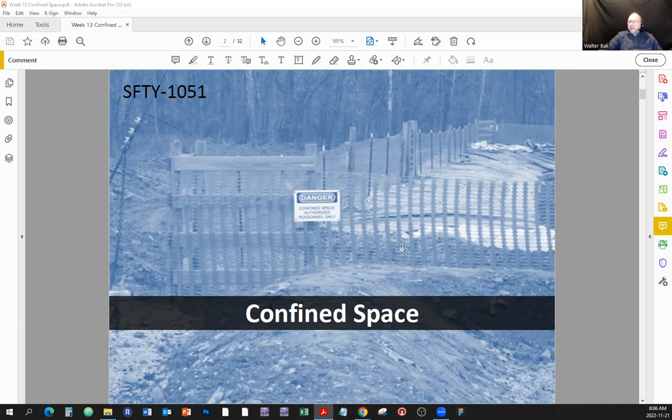Safety 1051, confined space lecture for today. All right. Just before we start, what do we have here? Just a little picture explaining things. It's a bit of a pre-word to the text that we're going to analyze in the next slide.

This would be some sort of a hopper. Right? A hopper is a device, well, a huge device to sort or load grains. For example, in this case, it's loading grains, so there will be huge containers here with some outlets at the bottom, and the grains are coming out over there.

There will be a little bit of a catwalk, and the catwalk is this right here, this walking area with some railings, of course, because it's on heights. And that's where the workers can walk and do whatever work they need to do there. All right. So here is a hopper. Here's a catwalk on top of the hopper. Okay.

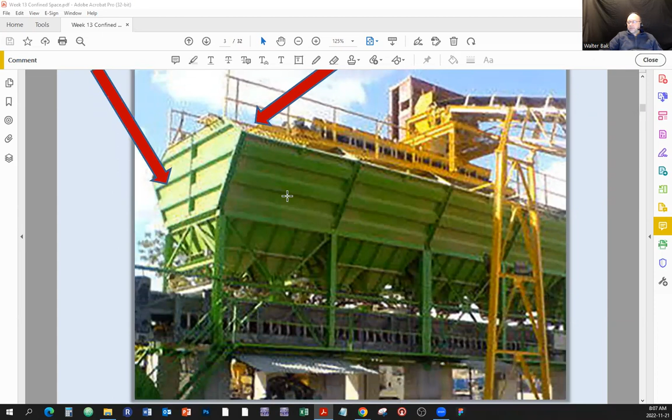So let's look at a certain case study. Here's the case study. While workers were unloading sand from a cement mixing hopper, the material became stuck and stopped dumping from the container. So this will be the container, and the grains or whatever the material would be just coming out of this outlet right there, loading onto what looks like a huge conveyor belt. So something stopped loading, something got stuck, so somebody came there and started investigating what's going on.

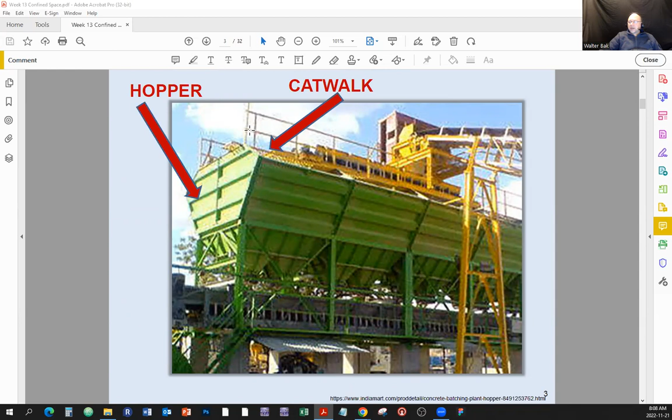A worker walked along the nearby catwalk with a 7-foot pole, intending to dislodge the sand. Okay, so it was a sand thing. Once the worker was near the hopper, he was out of view of the other employees. The top of the hopper was open, and while there was no designated entry point, the hopper was accessible from the catwalk. At some point, the worker entered the hopper, but no one could see him. No one knows whether he accidentally slipped or if he entered the hopper voluntarily.

Okay, hold on. When the sand became dislodged and began moving again, co-workers saw the 7-foot pole fall out of the bottom of the hopper with the sand. They were unable to locate the worker on site and realized he must have fallen into the hopper.

Eventually, rescuers extricated the worker from the bottom of the hopper and administered CPR, but unfortunately, he succumbed to his injuries a short time later. So that would be a fatality, a fatal accident, right? So here's the case study that we're opening up this lecture with.

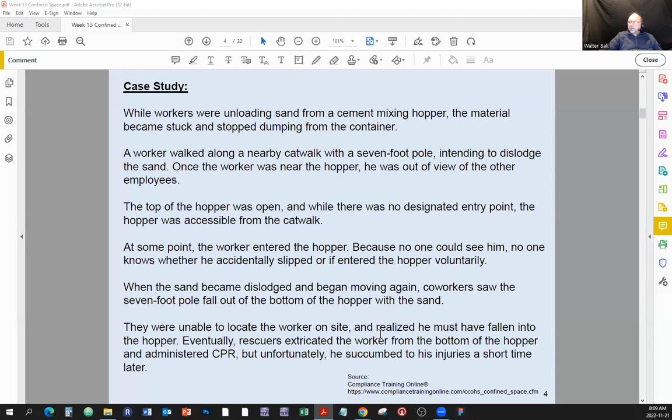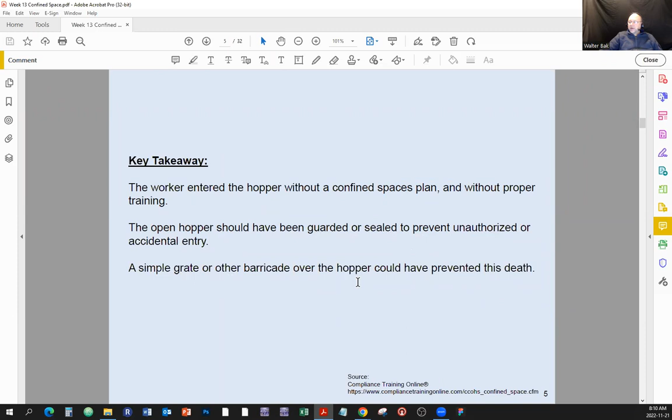Takeaway: the worker entered the hopper without a confined space plan and without proper training. The open hopper should have been guarded or sealed to prevent unauthorized or accidental entry. A simple grate or barricade over the hopper could have prevented his death. All right.

Excuse me. So then we're entering the topic of confined space. What's a confined space? And sometimes I read things, you know me by now. A confined space is a space that is large enough for a person to enter and work. That is the first condition. Has limited or restricted means of entry and exit. And here's the key: it is not designed for continuous occupancy.

Again, a confined space is a space that is large enough for a person to enter and work, has limited or restricted means of entry and exit, and it's not designed for continuous occupancy.

Here's how the Ontario regulation defines confined space: confined space means a fully or partially enclosed space. So you're looking at the legal documents here. And here are two conditions.

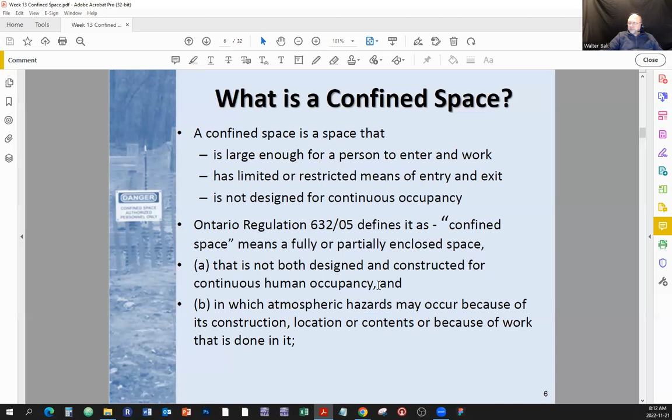Now, let's look at something that's called a permit required confined space. So first, we got the confined space in general. Then there's something that's called a permit required confined space. A permit required confined space has at least one of the following characteristics. It contains or has the potential to contain hazardous atmosphere, which, well, atmosphere is the air that we breathe in. Okay.

Contains a material that has the potential to engulf an entrant. What's engulfing? Well, if somebody drowns, they are engulfed in water. If somebody drowns in sand, then the person would be engulfed by sand or grain or so. So here's the engulfing thing, all right?

Also, it has internal configuration, we're going to analyze some of those situations, such that an entrant can be trapped or asphyxiated. Basically can no longer breathe. Or contains any other recognized serious safety and health hazard. Right, so here's a definition for permit required confined space.

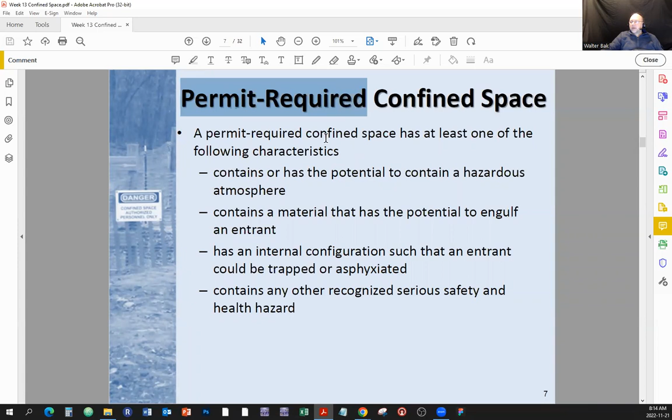Yeah, we do a lot of reading today, right?

What is an entry permit system? Well, an entry permit system is an administrative tool used to document the completion of a hazard assessment for each confined space entry. Things are serious. Someone fully trained and experienced in confined space work would complete the entry permit. It's not just anybody, right? You have to have a training to complete that.

Some jurisdictions require a permit for all confined space entries. So depending on where you are, you should be familiar with the local laws, rules, and regulations. An entry permit is required for confined spaces where the hazard and risk assessment determines the measures to control the risk involve the following.

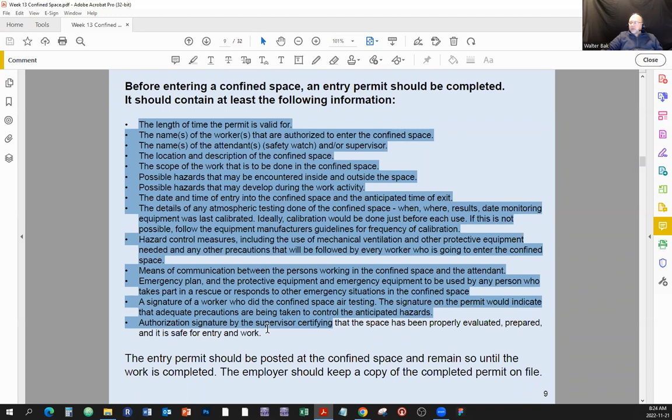The entry permit should be posted at the confined space and remain so until the work is completed. The employer should keep a copy of the complete permit on file. Still talking about confined space. All right, and here's the definitions. Once you download the file, you'll be able to have that. Hazard: what is hazard? Something that can cause harm, for example, toxic gases. A risk: a chance the hazard will cause the harm. Example, a high or low risk of asphyxiation.

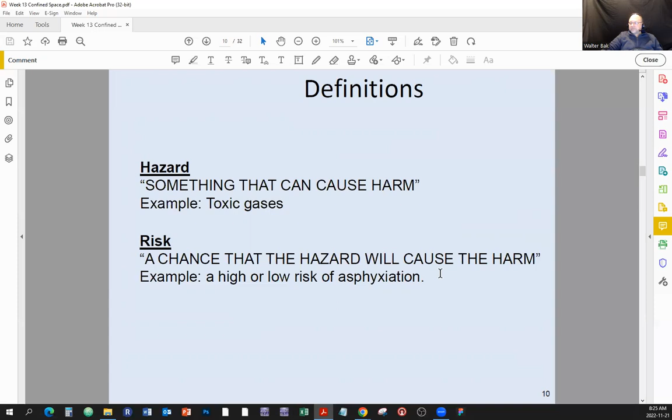Let's look at the confined space hazards. Keep in mind, the confined space is a space that you can enter and work at, but it's not designed for continuous occupancy, like somebody's office, where you can go and work 8 hours a day, 5 days a week. Confined space is a space that you have to enter sometimes, and it is not designed for you to basically work there all the time. So what are the hazards of confined space? Well, oxygen deficiency, that will be the atmospheric thing, right? Flammable or combustible gases and vapors.

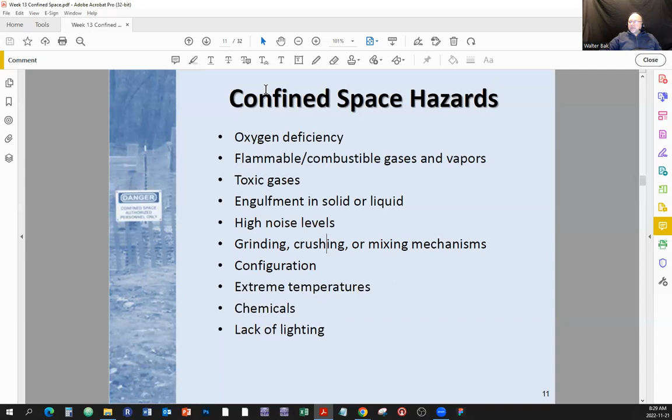Grinding, crushing, or mixing mechanisms. This will be part of the configuration of the description of the thing that would classify the space as a confined space. Right? So these two kind of get together. Extreme temperatures, chemicals, and lack of lighting. So these will be confined space hazards. All right.

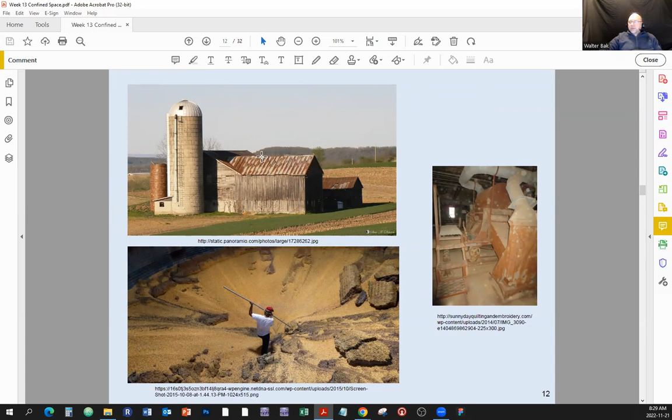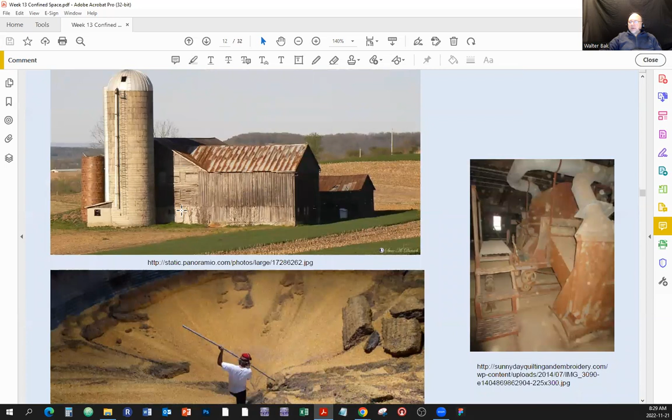What do we have here as far as confined space? Here are some examples. There's a silo. What's inside the silo? This thing is filled with grain right here. If somebody enters, if somebody falls in, they could be engulfed in the grains. This is the possible configuration of what's inside something like a silo, all right?

This person can be engulfed or overwhelmed by whatever the, well, it looks like sand and other debris. So in both cases here, you're talking about the hazard of, well, engulfment would be the main thing, right?

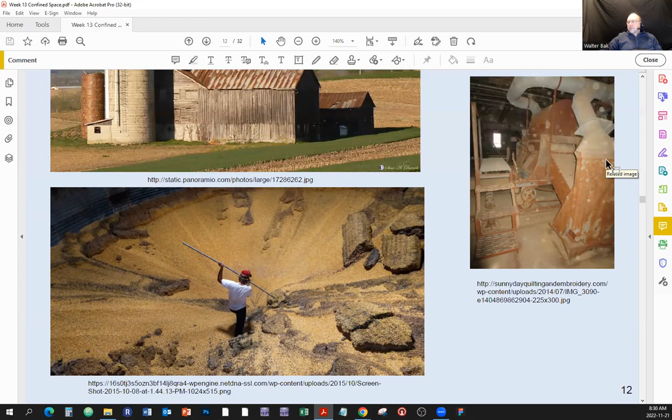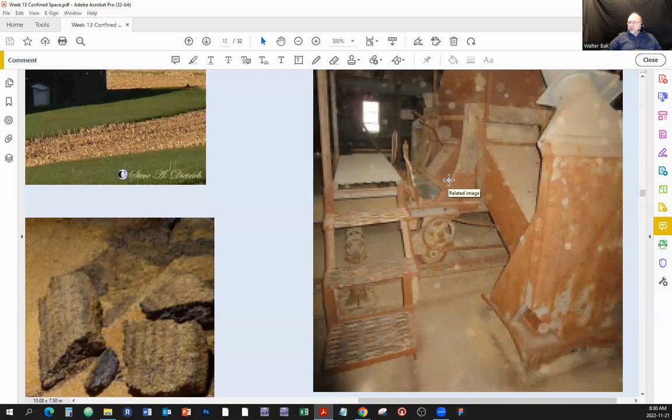Over here, here is a room with some sort of moving machinery and whatnot running. So this would be a space that is not designed for continuous occupancy. Maybe once in a while, you just have to go and adjust something and check for something. And this would be the example of the configuration, which means the arrangement of things that are inside, that could possibly pose a hazard to your health or well-being. And here are the references if you want to click on things. You can find out more about this.

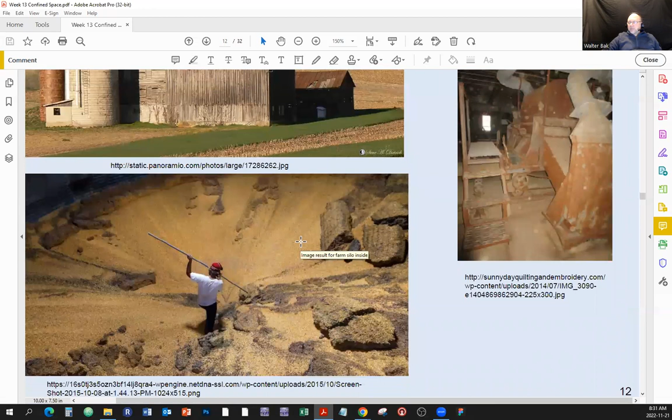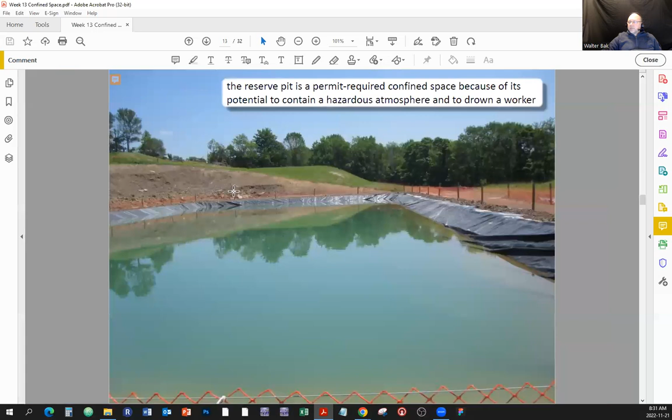All right. Now here is an interesting thing. You see this reserve pit here is guarded by a fence. The reason for that is, let's just see what that says. This reserve pit is a permit required confined space because of its potential to contain a hazardous atmosphere and to drown a worker. So at first you would see, okay, what can happen here? Well, somebody can fall in and drown. That's the first thing that comes to our mind. But no, you have to consider other things.

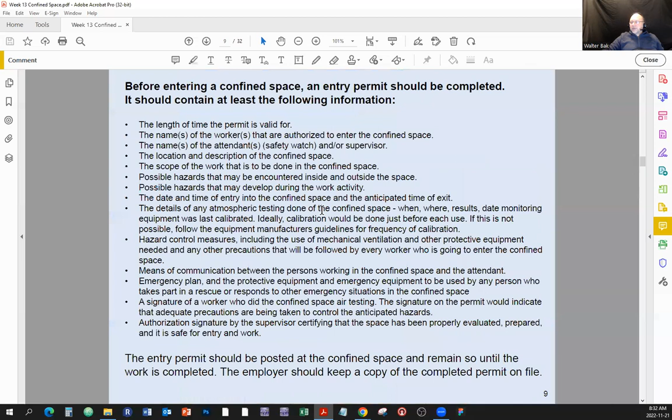Whatever that thing is here doesn't necessarily have to be pure water. It could be some sort of chemicals that if you come close to that, you can be overwhelmed by the chemicals, by the vapors, and then you can fall in. Or even if you don't fall in, you can still die because of the vapors that are in close proximity of that pit. So yes, this would be considered a permit required confined space because it contains any of that here.

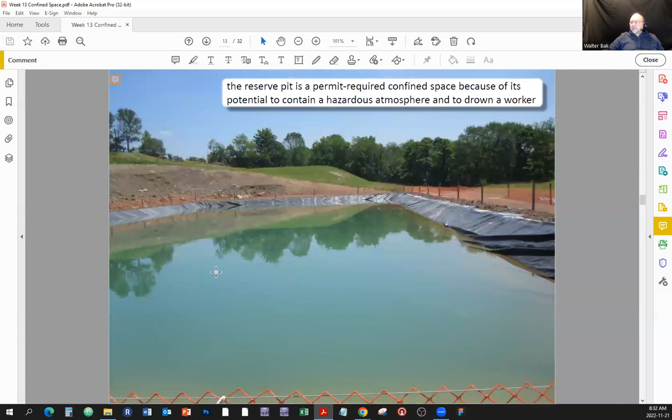All right, next slide. Here's an example of a permit required confined space. Again, there's an entry. Of course, definitely, this is not a space that would be classified as a continuous occupancy space. There's an entry here that a worker can get in and out, but it's a limited entry. There are many hazards there. There could be lighting, there could be high noise level, there could be some atmospheric lack of oxygen and whatnot. All right, so this would also be classified as a permit required confined space.

And on the bottom it says, always follow your company's permit procedures, even if you are going in there for just a second. This is how most of the accidents happen. I was just going to poke my head in there. Okay, well, there's a reason why things are being spelled out in this way. And unfortunately, the reason is because something happened to someone in the past.

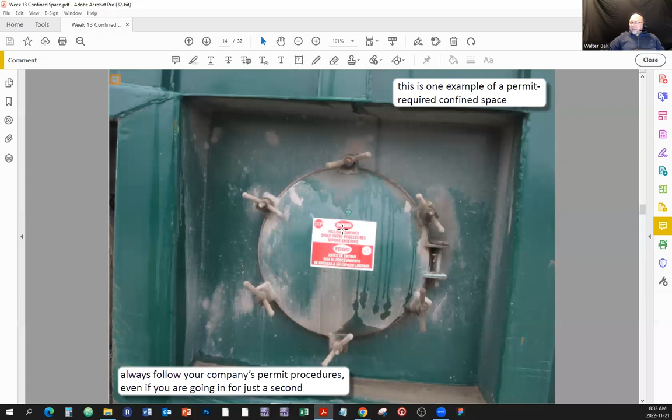I just want you to know that something like that exists, and if you are going to work or you're going to be asked to work in anything that could be classified as a confined space, I want you to recognize the hazards. I want you to recognize the signs of something being possibly considered as a confined space. Because for whatever company you're working, the person who sends you for a service call might not know that once you enter the building, oh, whoops, you're going to be dealing with a confined space.

Are you going to have situations like that? I would say yes. As an example, I had a few examples over the 30 years plus that I used to work in the service industry doing installations and service calls. Yes, I had situations like that, and well, I've seen people just going in there. Yeah, let's just do that. I never would. I would always make a phone call. Say, look, this is not good.

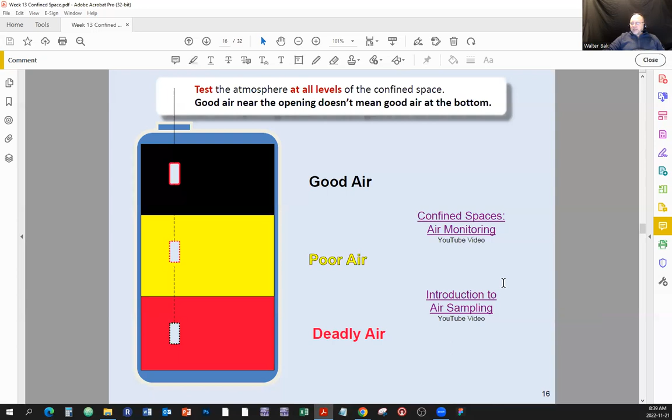Once you download this presentation, I would encourage you to click on this link here, which describes confined space air monitoring and the introduction to air sampling. So just watch these two videos. There might be some questions on the last test that have to do with these, right?

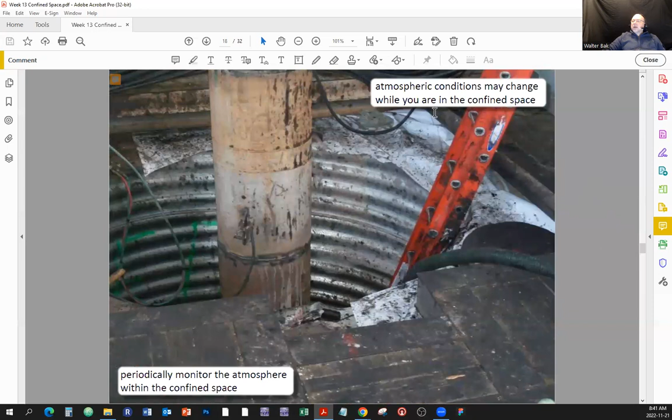Atmospheric conditions might change while you are in a confined space. Just because you have tested that things are okay now doesn't mean that things can't change. They can change within a confined space. Get out. All right. If a hazardous atmosphere is detected while a worker is in the confined space, what should happen? All activities should stop. The worker or workers should exit immediately.

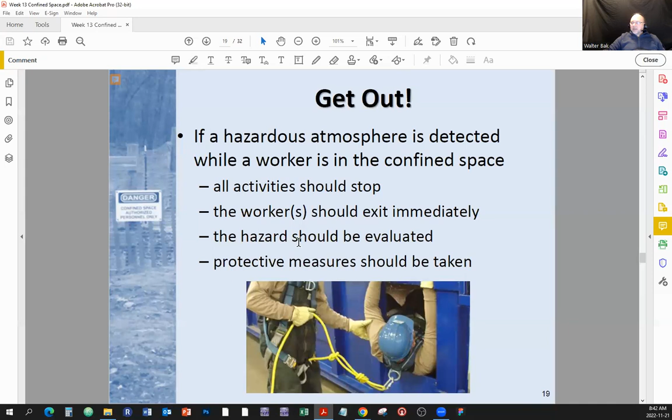Unfortunately, there could be situations where, when things change, the worker who is there has to be pulled out instead of walking out on their own. The hazard should be evaluated. Protective measures should be taken.

If a worker must wear a respirator, remember that an air purifying respirator will not do anything if the oxygen is deficient in the space. So basically, a respirator or a mask will do a wonderful job if somebody is sanding drywall, just so the dust doesn't get into the airways, but there is oxygen in the room. That same mask will not do anything if there's no oxygen to breathe. So things have to make sense and appropriate equipment should be used.

Adequate illumination should be provided where the lighting is limited. In some cases, explosion-proof lighting might be necessary. What's explosion-proof lighting? Explosion-proof lighting means all the devices are enclosed in such a way that if there are some flammable gases in the confined space, turning things on and off, and the way the equipment works, there could be a tiny bit of sparks, like when you are turning the light on or off in your kitchen.